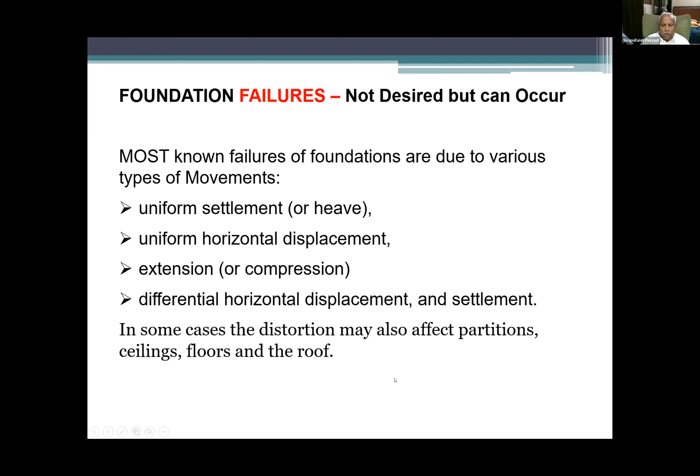Foundation failures are not very uncommon, but they are not desired. Many times we attribute failures only to movements such as uniform settlement or heave, uniform horizontal displacement, extension or compression, differential horizontal displacement and settlement. In many cases, this failure may not be reflected as collapse of the structure, it may instead appear as distortion, also affecting partitions, ceilings, floors, and roofs, etc. This is common.

When you load a foundation beyond its desired capacity or allowable pressure, it will undergo settlement or develop cracks and fail. This is the one which all geotechnical engineers are well aware of.

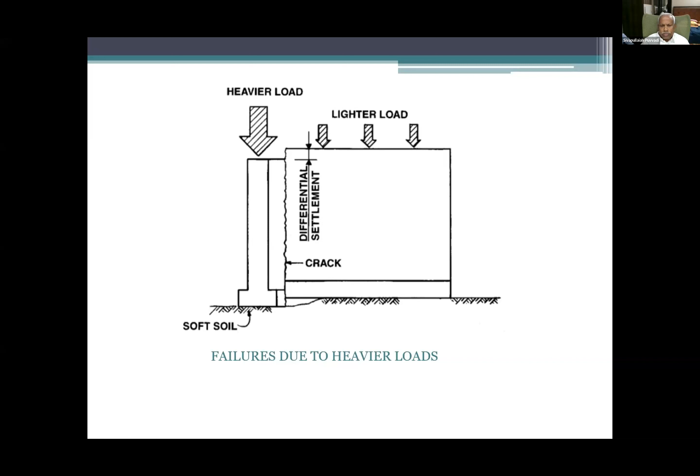Now, as I told you, the failures may be reflected as structural cracks, foundation movement, opening distortion. Foundation movement tends to distort openings and often causes doors and windows to stick. Floor movement is the initial effect of foundation movement on unstable soil beneath, or bulging of the floor. Today we discuss about problems not necessarily related to heavier load or soil capacity, but unexpected, unseen, surprising heaving, whose characteristic behavior is totally different from the heaving we know from geotechnical engineering.

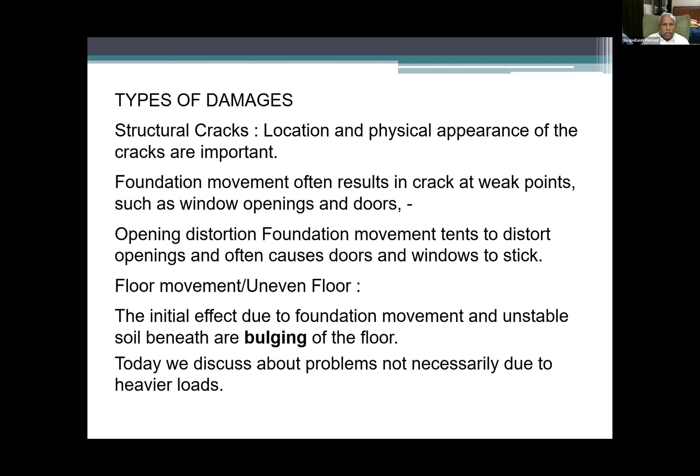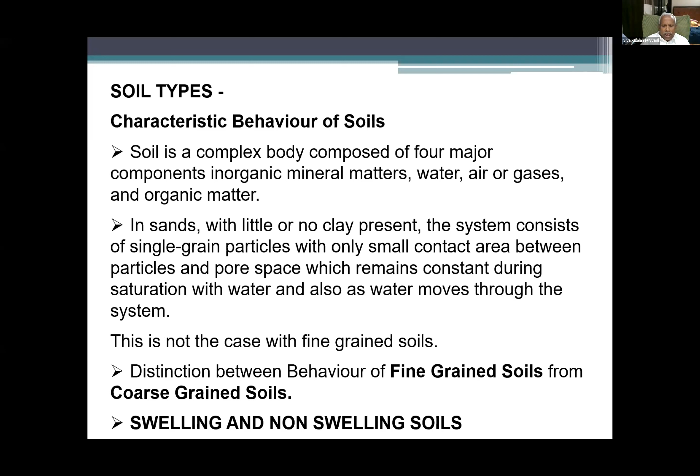Soils are initially classified as coarse grained soils and fine grained soils. As all of you know, there is not much of a problem in foundations on coarse grained soil, but when it comes to fine grained soil, we have to be a lot more careful, because each clay behaves quite differently from the others. Coming back to the behavior of fine grained soil - why do different clay soils or fine-grained soils behave differently?

It is because they undergo more volume changes. They swell and shrink on wetting and drying, and they are also influenced by ionic concentration or the composition of the pore fluid, or the leachate, or any other contaminant present in the leachate. And how this reaction occurs under different environmental conditions depends on the way they are formed.

Whether all of you know how different clay minerals are formed - I will just summarize, but I will not go into details, as most geotechnical engineers are well aware of how different minerals are formed. But I can briefly summarize their properties.

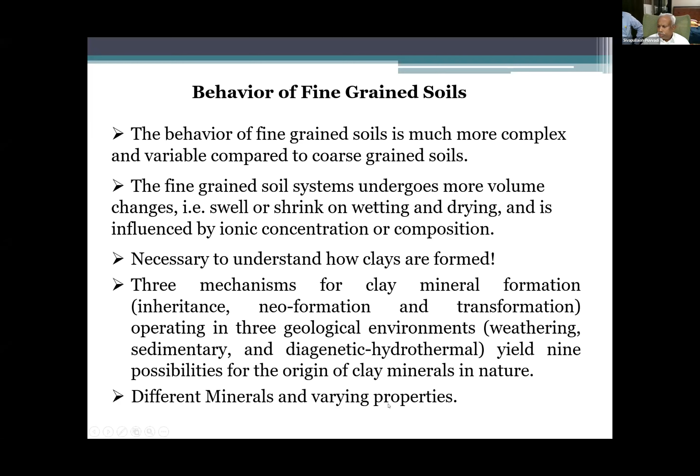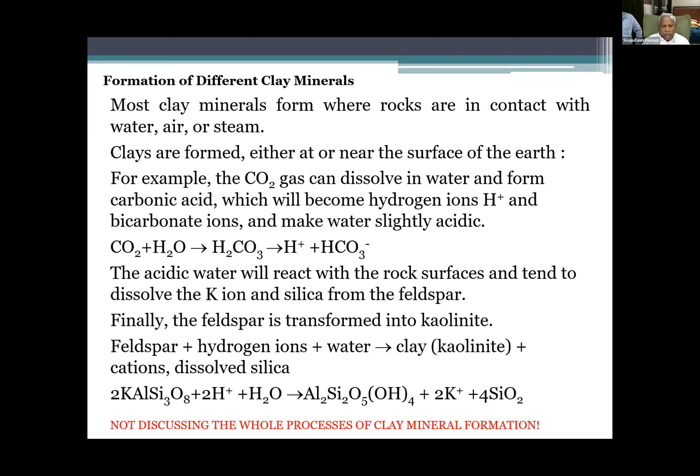As you know, clays are formed when rocks are in contact with water, air, or steam. Clays are formed either at or near the surface of the earth. Depending on how carbonic acid exists in acidic conditions, different rock types like feldspar undergo reactions leading to the formation of different types of clay minerals. Again, I'm not going to spend too much time on how clay minerals are formed or how they behave in different environments.

These are the various common clay minerals, including kaolinite, halloysite, pyrophyllite, smectite, vermiculite, illite, chlorite, and mixed layer minerals. Today I may cover a little bit about this mixed layer mineral, where not much data exists on how they behave, particularly in an environment where the pore fluid is not just normal water, but contaminated with chemicals, etc.

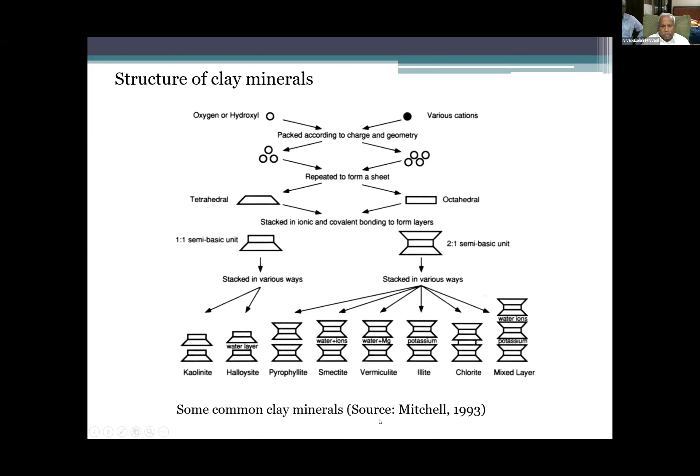Kaolinite is considered relatively non-expansive, and illite is somewhat expansive. Chlorite mineral along with illite is very common and it behaves slightly different. Vermiculite has the ability to absorb water, but not again and again. You know much about smectite, particularly when you come to the topic of smectite minerals.

It is extremely different. Say, for example, sodium montmorillonite - all of you know it. The liquid limit of sodium montmorillonite can go up to 1,000, whereas calcium montmorillonite can be only less than 200. You can estimate the way smectite behaves just because of change in the exchangeable ion. So when that is the case, there are a lot of changes in the behavior, particularly the swelling behavior of montmorillonite, which can vary very drastically.

The amount of water absorbed in sodium montmorillonite, or sodium smectite, is 18 layers of water molecules between layers, whereas for calcium it can be very, very less than that of sodium smectite or sodium montmorillonite. So these are the normal changes that occur in the clay mineral. Say, for example, initially when it is sodium montmorillonite and it gets exchanged in the field condition, the swelling pressure or the allowable pressure can change drastically, and there can be a lot of implications for structures that are built on this kind of soil containing montmorillonite.

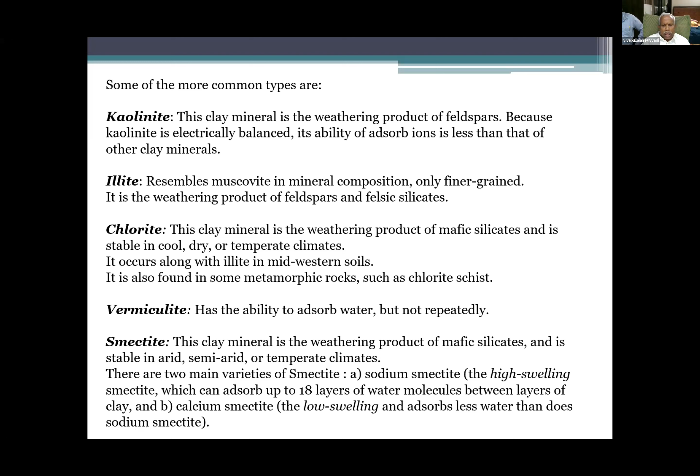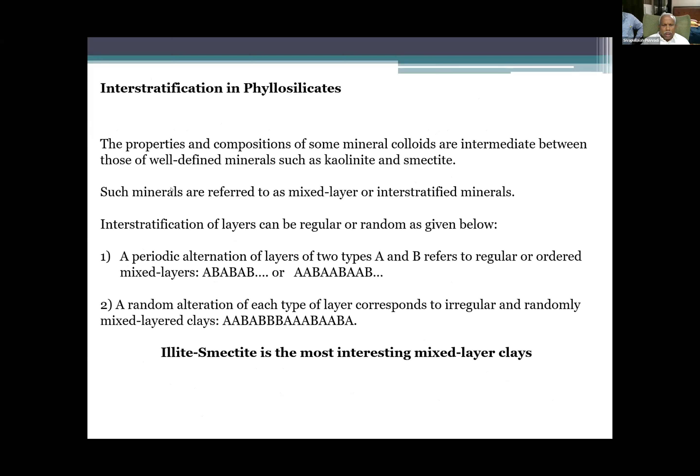Now I will talk a little bit about interstratification of phyllosilicates. These are not like well-defined minerals such as kaolinite and smectite. These extreme minerals can be interstratified by different layers, each layer varying from the other. You can say, for example, there can be illite and then smectite, then illite, and there is an extent of randomness of these layers.

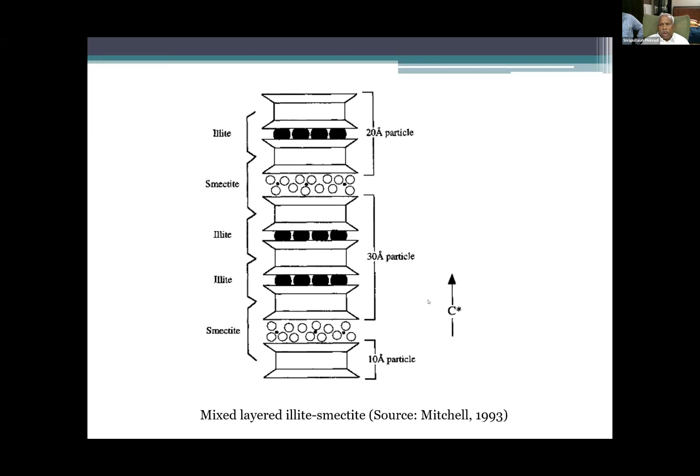All these clay layers are phyllosilicate layered structures - very well defined layers of smectite, kaolinite, and illite. When it is an interstratified mineral, the structure can be quite complex.

So basically the clay minerals' behavior depends on the cationic exchange capacity. I hope all geotechnical or foundation engineers are well aware of the cationic exchange capacity, specific surface area, and the dominant clay minerals present in fine-grained soils.

So the clay minerals can have very high swelling if they contain 2:1 minerals whose specific surface can be up to 800 meters square per gram. Specific surface has a great role when it comes to changes in the nature of the fluid or chemical that is going to interact. Whereas, say for example, kaolinite can be only 10 or 20 meters square per gram.

So when there is a huge change in the cationic exchange capacity, as I told, the liquid limit of montmorillonite, even in natural condition - not highly purified - can be 300, 250, etc. And again it can change depending upon the exchangeable ion, and the interaction that takes place because of the large specific surface of these clay minerals.

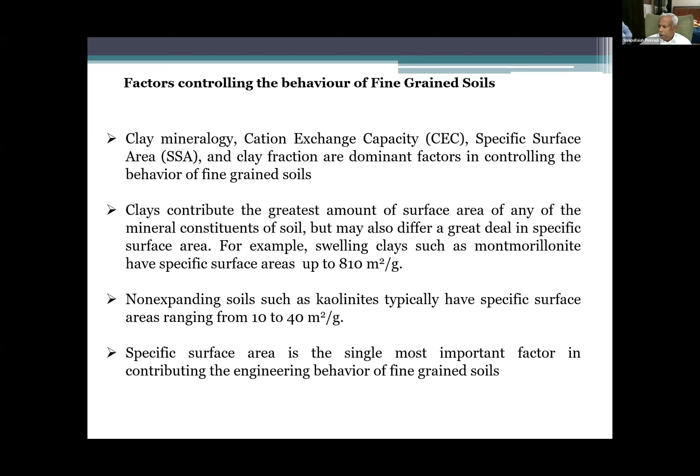So without going into much detail on this aspect, which I assume most geotechnical engineers have some idea about, the topic I wanted to cover is slightly different. This is only some basics I'm trying to give. This is a summary where the cationic exchange capacity and swelling potential of different clay minerals can change.

Now you know that clays, particularly when they have negative charges on the surface - no particle which is not ionically balanced can be stable. These negative charges on clays are neutralized by attracting positive cations, whether it is sodium or calcium or any other ion. But when these clays, which have cationic exchange capacity, also allow water to be absorbed, the particles are separated in the initial stages of swelling. I am trying to explain the basic swelling as understood today by almost all geotechnical engineers.

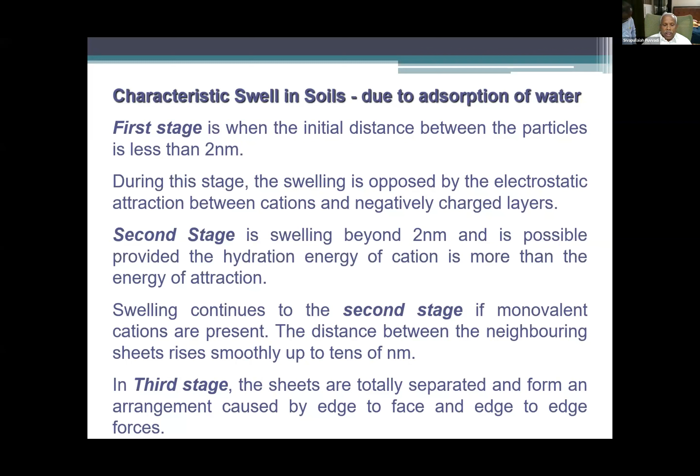I assume all of us are familiar with the effect of changes in the fabric, whether dispersed or flocculated. The behavior of clays can change very much depending upon whether it is flocculated or dispersed.

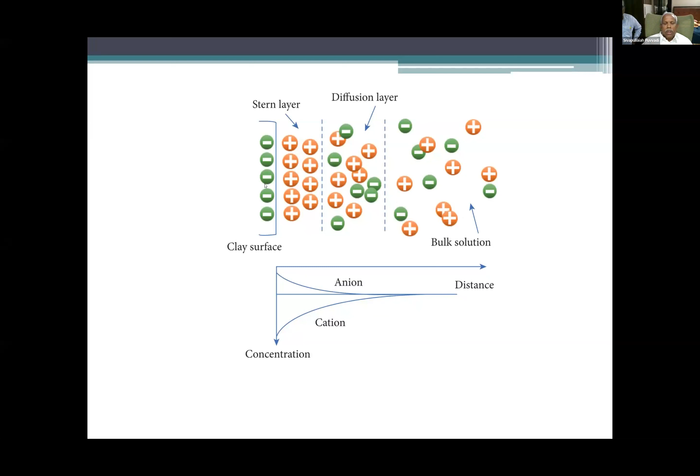Next, this is again how the negative charges behave once absorbed on the clay mineral surface. We will try to explain the extent of separation by diffuse double layer thickness. When the clay mineral surface is negatively charged, the positive ions try to come as close as possible. The closest layer of positive ions is in the stern layer, much more strongly absorbed to the clay mineral surface. Moving to the next stage, the attraction goes on decreasing. So how the concentration of anions and cations are distributed near the clay mineral surface dictates how the clays can swell and consequently how they behave in contact with water.

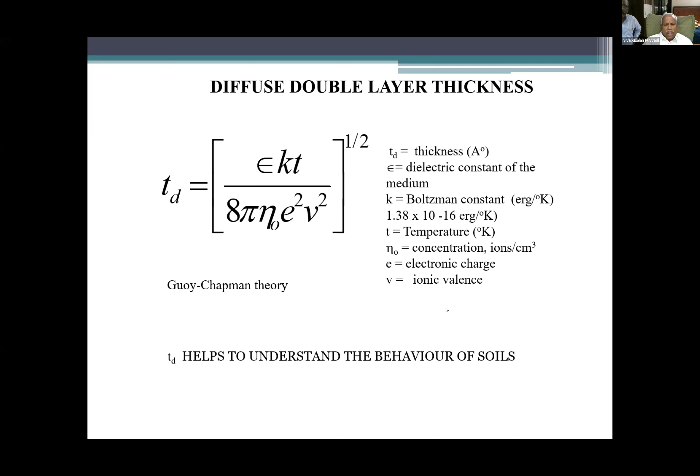There is a theory, the Gouy-Chapman theory, which lets you calculate the thickness of the diffuse double layer. This means the extent to which the negative charges of clay minerals can exert control over water as well as the cations absorbed on the surface. This is commonly used, most theoretically, but in field conditions there are a lot of limitations. I will tell you that next.

Limited, because diffuse double layer theory can somehow account to some extent for the behavior of smectite or montmorillonite kind of clays, but it cannot explain the role of cations on the kaolinitic type of soils. This is where most predictions based on the liquid limit of the soil are only relevant to smectite type minerals. So when it comes to kaolinitic soil and its changes, it totally fails.

In fact, I've seen, I should not name some of my former students, not my student, I'm talking about the whole group, where they conveniently eliminated the kaolinitic soils in their prediction and confined themselves to soils which are montmorillonitic type. And again, these predictions can go wrong when there is electrolyte concentration or sometimes when there is hydroxide.

For example, in the case of kaolinite, when ions like fluoride or DMF or dimethyl sulfoxide come in, they can throw away the hydroxyl ion of the kaolinite and it will swell. In fact, these clays swell much more than montmorillonite in the case of certain ionic concentrations present in the leachate. Let me repeat this: kaolinitic clays, because of replacement of hydroxide on its surface by other ions like fluoride, DMF or DMSO, can swell much more than montmorillonitic soil.

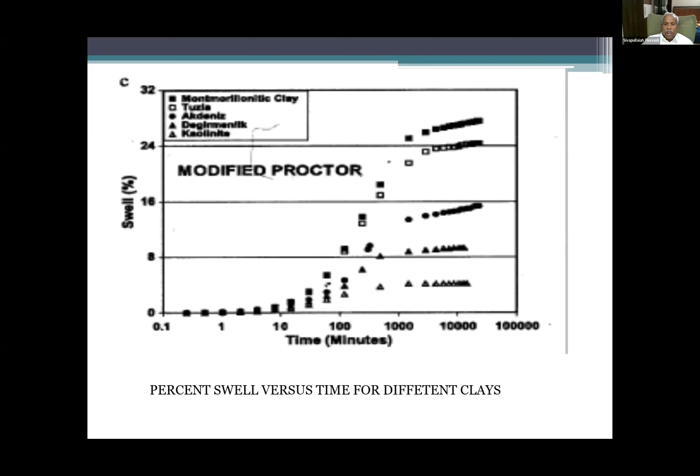That's why, for example, we can predict the percentage of swell using an oedometer, or pre-swell oedometer swell at a nominal surcharge, depending on density, which plays a very important role. Different clay minerals swell to different extents. When you plot time versus percent swell, the characteristic swell behavior occurs in initial, primary, and secondary stages. We define a coefficient of secondary compression, the secondary swell, similar to what you can say about compression.

But the forefathers of soil mechanics never tried to probe too much into swelling. They concentrated only on settlement or compression, unlike the case of swelling, which you can similarly classify. Predictions are based on the nature of the curve.

Based on the initial way the soil can swell, the ultimate swelling is predicted based on the mathematical nature of this curve, the S curve. We can predict the ultimate swell. Of course, that is a separate topic, maybe for question and answer. But we can predict the swell behavior of normal soils based on the swelling in the initial stages.

Another factor, as I told, is the fabric. The fabric is a very important thing. I used to ask my students: what is flocculation, what is dispersion, you should be able to explain. The structure of the foundation soil changes from flocculation to dispersion or dispersed to flocculation, depending upon the environment. When the salt concentration in the fluid is very high, there will be aggregation. When the pH is very high, the soils can swell very high, and there will be huge difference.

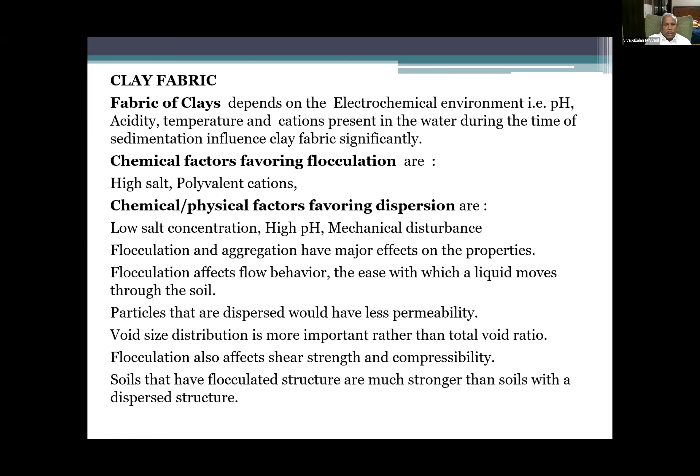Now, this is the beginning of my actual lecture. This is only introduction. Don't be afraid, I will not take more than what Professor Reddy has allotted to me.

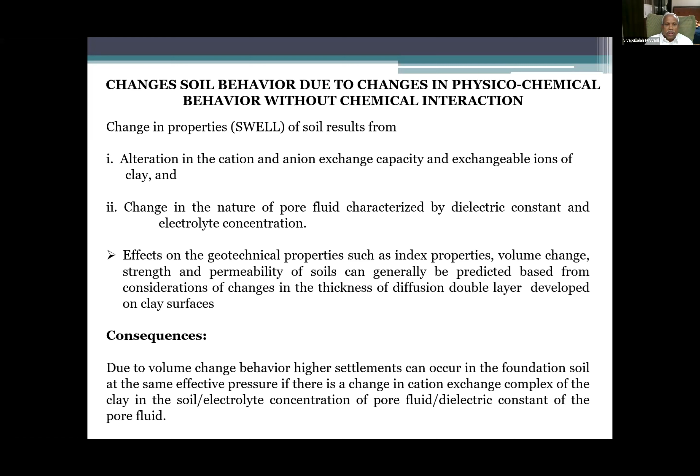I will talk briefly about the behavior of soils without and with chemicals. When there is a cationic change, there will be a change in behavior. When the dielectric constant of the pore fluid changes, we can explain the behavior. When anions are present in the system, the characteristic swell of the soils also can be understood. These changes, to some extent, are understood, but people have not concentrated on why these changes in the characteristic of soils can occur.

So swell potential can change depending upon the type of clay, type of exchangeable ions, electrolyte concentration, and particle size distribution. More than particle size distribution, I will weigh much more on void size distribution. See, for the same void ratio, if it is divided into a large number of finer voids, the total void ratio being the same, the void size matters a lot.

Say, at the same void ratio, when the void sizes decrease, tortuosity comes into the picture. The way the fluid can go through small voids, finding it very tortuous, very difficult to go through the soils when the voids are divided into very, very finer sizes. And of course, total water content affects the behavior.

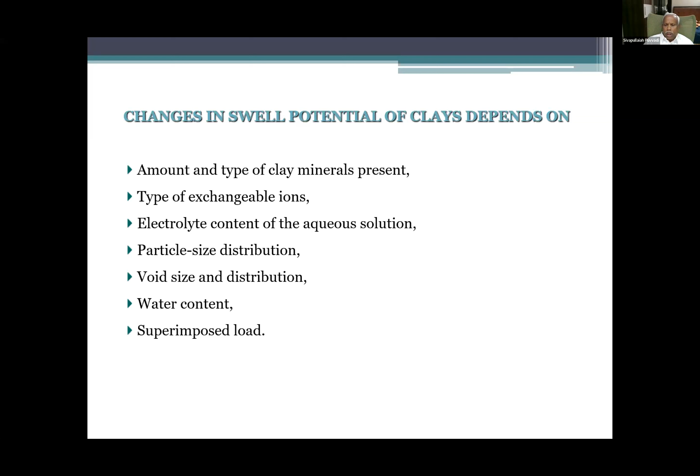Suppose the soils are loaded more than their allowable swelling pressure, then the variations are very, very minimal. Whereas if it is underloaded, the problems are much more.

For example, schematically, when there is a contaminant fluid beneath the foundation, contaminant is occurring. When the contaminant is trying to enter into the pore fluid, there is high concentration of salt, say for example. Of course, I can put many scenarios, but the simplest way of expressing is that when the contaminant is flowing, the swelling pressure of these soils can reduce and the settlements will be more.

So it will not go uniformly at a time, so the structure will tend to settle towards it. And vice versa, if you put a contaminant which can cause swelling, the structure will undergo a different kind of tilting. If you dance, well, it's okay, but we don't want structures built on our clays to dance. Dancing is fine when you're watching a movie, but when the structure undergoes uneven settlement on one side, and unlike settlements, heaving also can cause differential heaving.

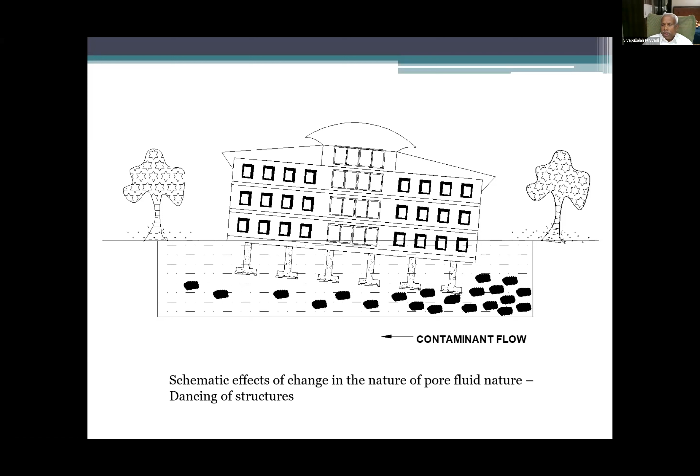Normally, people don't talk about differential heaving as much as differential settlement. So I would like to emphasize more on differential heave in this kind of scenario rather than differential settlement. One more example: kaolinite soil can swell much more in kerosene, whose dielectric constant is very low, than in water. Whereas montmorillonite soil can swell much more in water than in kerosene.

If you take kerosene as the pore fluid, which soil will be more called swelling type? You call kaolinite as swelling type and montmorillonite as non-swelling. That's why the whole basic concept of expressing free swell index is modified.

We should not take these volumes as real. To define that, we have to modify this equation: V minus Vs by Vs. The Vs is the volume of the soil solids, total volume in kerosene or water.

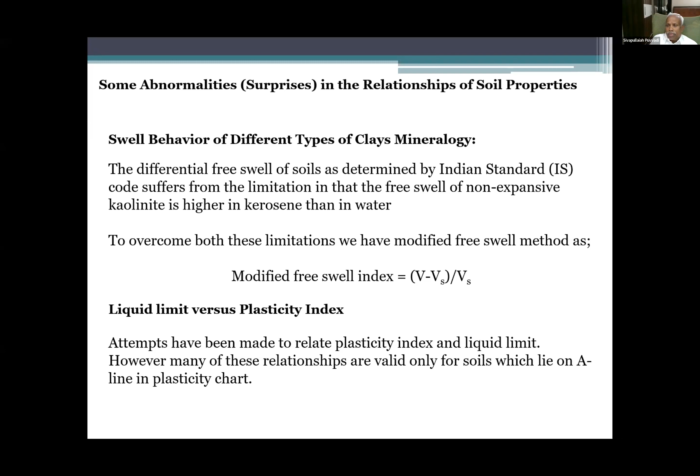Because of this kind of scenario, there can be a lot of distortion to our understanding of the relationship between liquid limit and plasticity index. For want of time, I'm not going into details. And then we have an understanding that plastic limit is higher than shrinkage limit—no, not always.

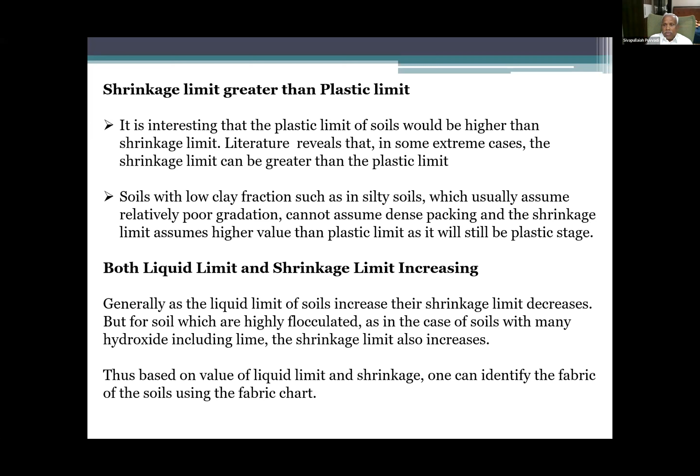So in both cases, normally what do we say? When the liquid limit increases, shrinkage limit decreases. But there are cases where liquid limit and shrinkage limit both can increase. That is because of the pore fluid concentration varying, or contaminant present in the fluids.

And similarly, density effect on the strength of the soil. As we know, as the density decreases, strength decreases. But in some cases, when the density is decreasing, strength is actually increasing.

This is the normal scenario where some of the changes are: when the soils are flocculated or connected, density is much less important than the structure. So there can be a scenario where with increasing density, strength can decrease.

If we say that, people won't accept it immediately. But there are conditions where density increase does not necessarily increase the strength if the pore fluid is different.

Coming back to lime stabilization, I just now understood that still some people are actively working on stabilization of expansive soil, because now we know why we have to stabilize montmorillonite, where conventional mechanical stabilization is not that effective, but lime stabilization can bind the soil particles. I'm not going to explain the basics of soil stabilization using lime.

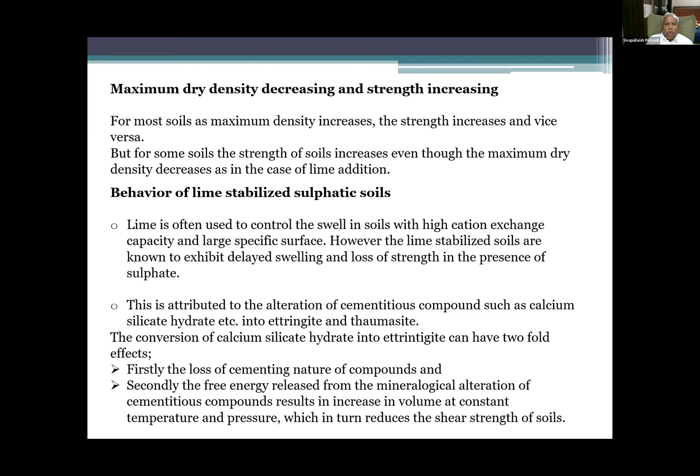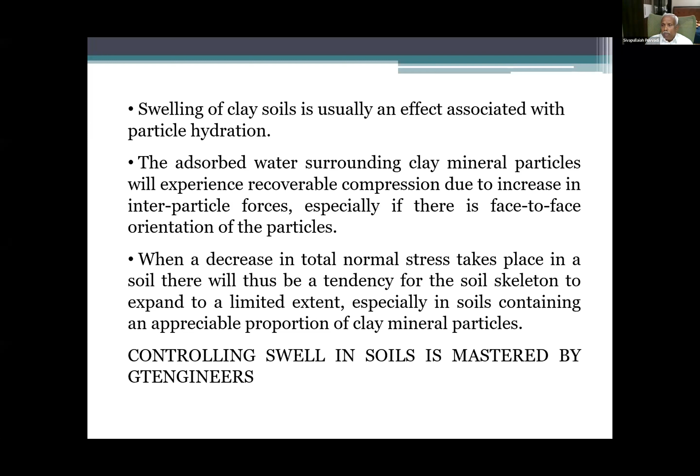These sulfatic soils can swell because of formation of calcium silicate hydrate gel, which is a cementitious compound, that is converted into ettringite, which is a swelling type of mineral.

Again, I am a little bit intrigued and I tried to probe a little more. Suppose you add ettringite mineral itself to a soil, can it swell? But I found that's not the case.

But the ettringite that is formed after interaction of lime with silica and calcium silicate is formed slowly. These needle-like structures of ettringite are formed, which hold a lot of water.

When the water is absorbed so high into the interlayer, the particles are separated. There is a huge swelling in soils in the presence of sulfate. So my submission to those who are continuing to work on lime stabilization, particularly in different environments—this is one case of the effect of sulfate.

We don't know in future, the way we are contaminating the soil, what type of chemicals will damage the good behavior of stabilized soils. This needs to be foreseen, and appropriate measures should be taken.

This is actually a learning point for me to probe further into the uncharacteristic soil behavior of soils. So I'm watching time also—normally when I'm involved, I lose track of time.

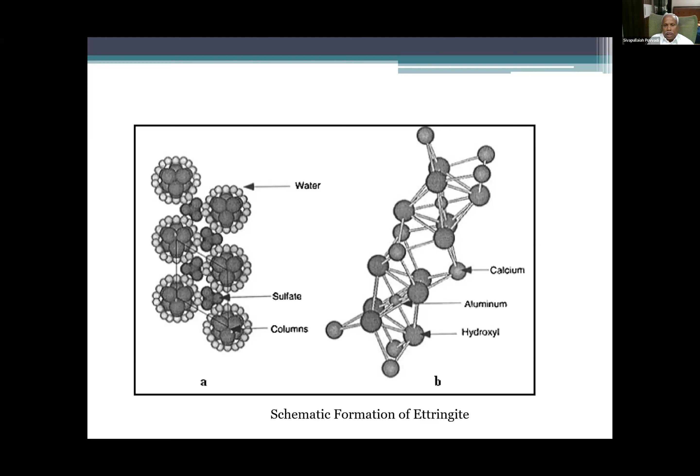I'm worried about time because I get involved. So this kind of thing occurred—this is your ettringite, what people call it.

Now I will come to a few case studies reported earlier, and my own experience of unexpected soil behavior of heaving. The first I told you—one of the classical cases is in a fertilizer plant where they are draining out the waste treated phosphate, which is used for the manufacture of fertilizer, and this leaks into the subsoil.

Slowly, and that soil is a non-swelling kaolinitic type of soil—nobody expected that soil would swell. But slowly, over many decades, the soil started swelling and heaving. This is because, and this heaving is much more in kaolinitic soil than in montmorillonitic soil, the hydroxide is replaced by a bulky phosphate ion, whose structure is similar to water.

I am not going to explain the structural similarities of water and phosphate, unlike hydroxide that will separate the kaolinite particles. This being the case, when phosphate is introduced into a non-swelling soil, that soil swells a lot. If I say kaolinite swells more, people won't accept it.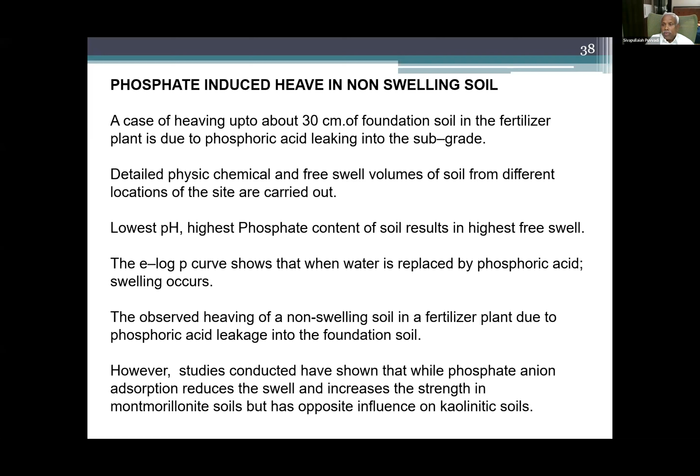What is swelling or non-swelling is an environment-related parameter. We cannot say swelling soil or non-swelling soil applies in all environments, particularly with phosphate. One fertilizer factory case, I myself dealt with. Then I went to literature that was also reported earlier. Then we wanted to check whether it is really true that when phosphate comes into the foundation soil, it swells.

So what we did is we collected uncontaminated soil near a fertilizer plant and ran the conventional oedometer test. When you add water, it's normal. In the rebound, when you put phosphoric acid, it rebounds more. So these swell. We repeated this at different pressures, putting water or acid. We found water always settles.

If you put acid, it will rebound more - huge rebounds. That means when you put acid and take out water in the oedometer to the extent possible, then try to put phosphoric acid, it will swell. So we have confirmed that the soil can swell, will swell in kaolinitic soil if phosphate is present. So this is the issue.

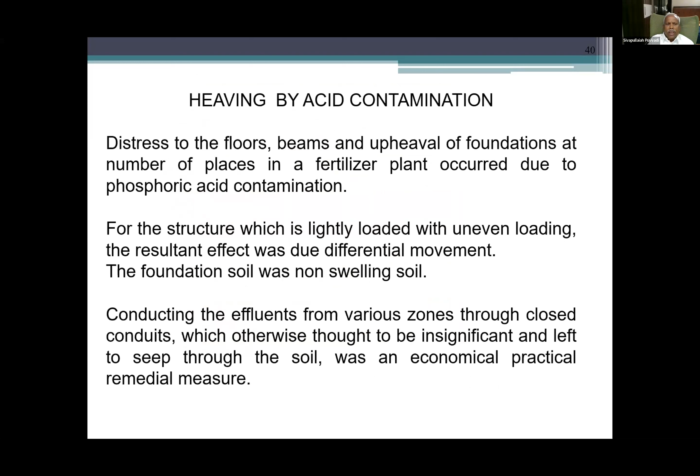This I repeated in some other cases. So we studied this - it is because of replacement of hydroxide. Simple, any student can do: in a kaolinitic soil, put water, some free swell will occur. Instead of water, if you put sodium hydroxide, or instead of hydroxide if you put fluoride - HF, sodium fluoride or something - it will swell more. Because hydroxyl ions have hydrogen bonds between interlayers, but when that hydrogen bonding is removed by the presence of fluoride, the kaolinitic soil will swell.

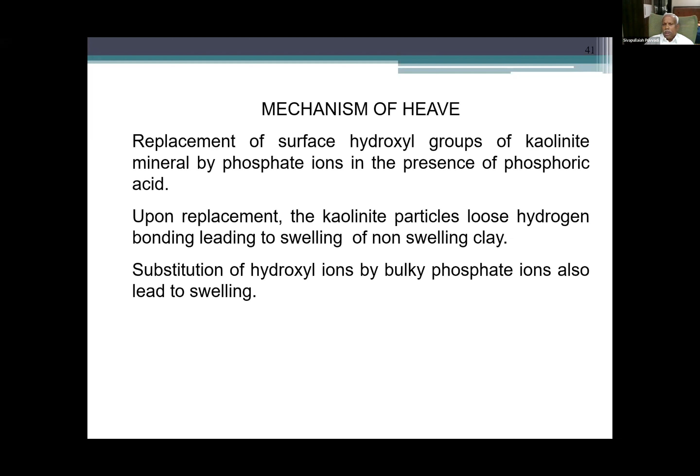So this swell is again unexpected, surprising swelling in soil. This is surprising because we never thought kaolinite would swell. When it swells, we call it surprising and close the chapter. But we have to probe and try to find out how it can swell. A similar case was reported at a Jordan fertilizer plant.

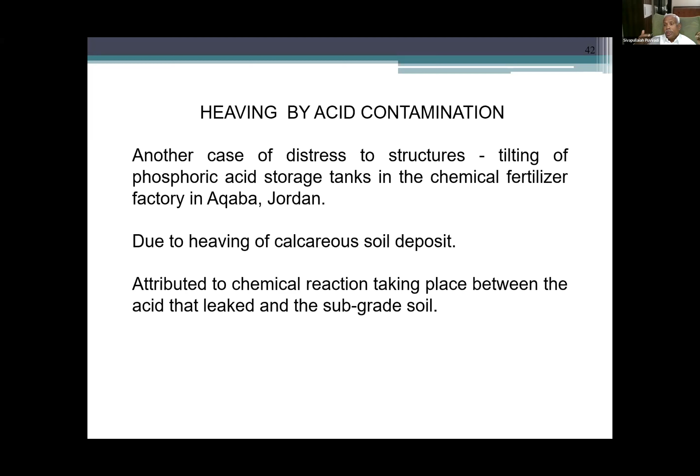This is one story for one type of soil; where the type of soil changes, the story varies to different degrees. Each case could be explained for an hour, so now we'll talk about remedial measures. Unlike ordinary swelling that is controlled by imposing higher surcharges, this kind of swelling cannot be stopped by increasing the surcharge.

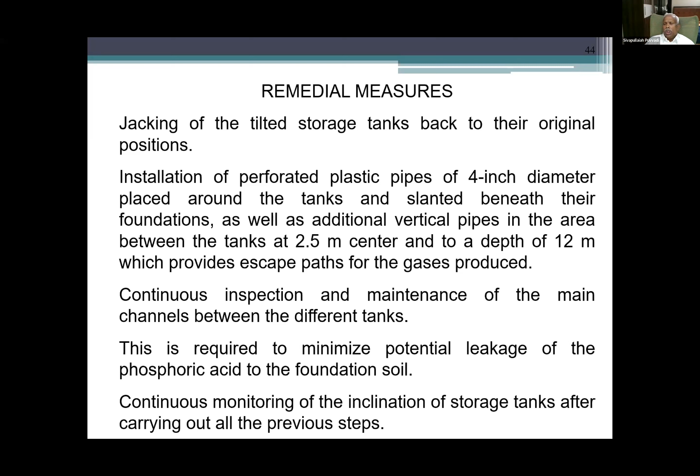So your conventional jacking of foundations or tilted tanks from the other side - of course you can also compare to the Pisa tower. What methods can be used to control the leaning of the Pisa tower? That is much more sensitive; you cannot do any experiment on it. But the conventional methods of correcting tilting of buildings, tanks, or towers are not possible using conventional understanding in the geotechnical industry.

Another thing: when caustic soda enters the soil, there will be foundation heaving observed after 20 years of operation. I am fortunate to have a connection with one industry that approached me for this correction. After trying all their conventional methods of control - leaching, loading - all conventional methods of correcting the damage to the floors.

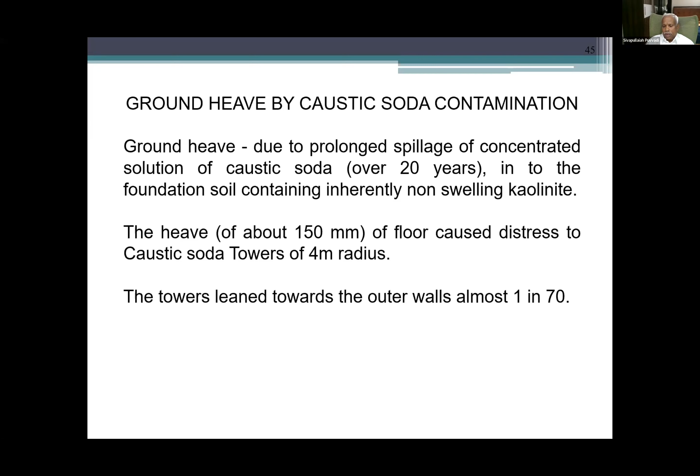Subsequently, we suggested remedial measures for correcting the rising of the floor due to alkali contamination. So now, coming to the mechanism of correction for heave caused by sodium hydroxide or alkali solutions - I will give one more case study, maybe 5 minutes, and try to wind up.

Under 5 minutes, sir, 10 minutes, Professor Reddy? Yeah, no problem, go ahead.

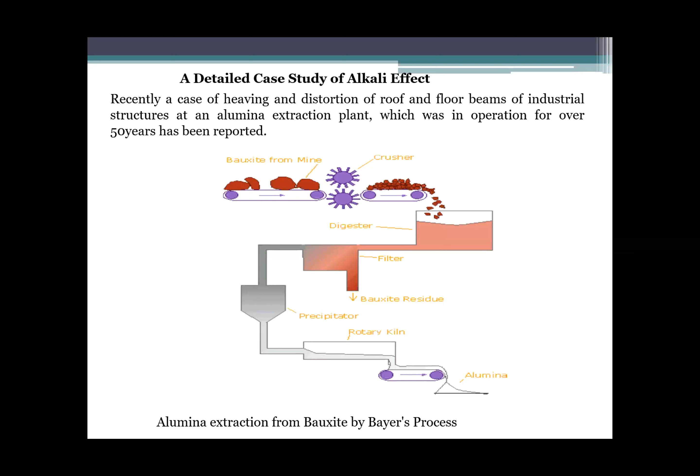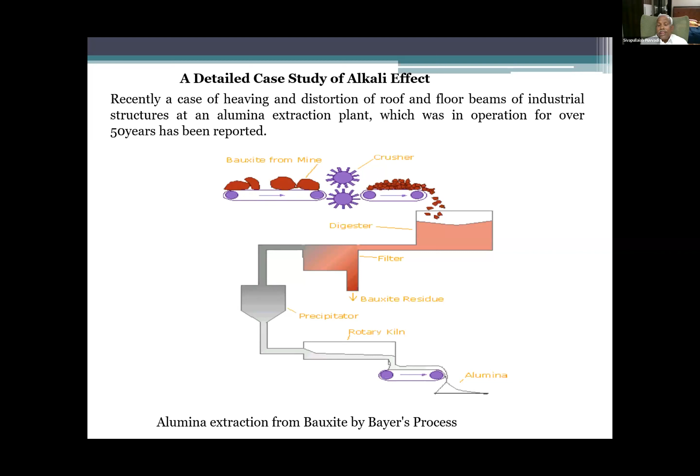This is one case, a company processing bauxite ore. Bauxite ore is very stable. To extract alumina, it has to be digested at very high temperatures and pressures with a strong alkali solution. So when there is treatment of bauxite with strong alkali at high temperatures and pressures, leakage occurred. That's why, in the next slide, you see how the alkali is leaking into the foundations of the factory.

Alkali is spread into the foundation soil. Normal problems of concrete is one thing, that aspect I am not covering today. But when it goes into the foundation, a lot of damage is done. That's why I say it is not the problem of civil engineers, it is the poor mechanical engineers who allowed leakage and converted all geotechnical engineers into geoenvironmental engineers.

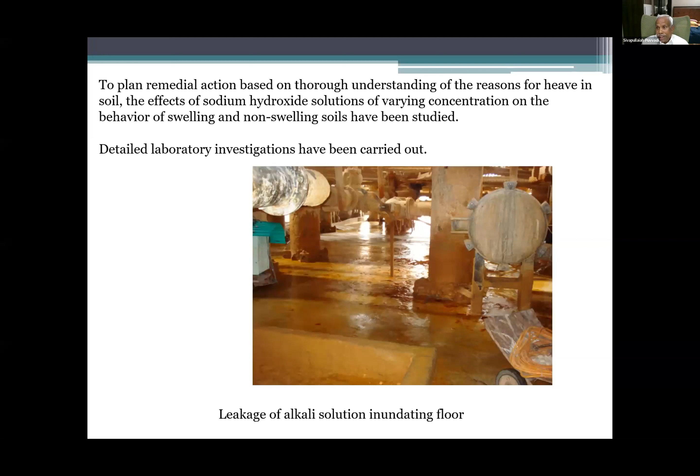So this soil is heaving because of alkali. But unlike some of the cases I have presented, it is not only kaolinitic soil, montmorillonitic soil also can swell. This is the case where swelling can occur in any type of soil if it interacts with the alkali solution.

Of course, one answer is zeolitization of the minerals by interacting with the alkali. We call these modified soils. In fact, now I try to say it is modified - India is getting modified now, not modified. So the soils also can get modified, and a lot of this occurs for any type of soil, whether kaolinitic soil. Now, how do you prove that kaolinite can swell?

And what is the effect of duration? What is the effect of concentration? So we have studied one soil, compacted to the same density, and allowed conventional oedometer test with water. Instead of water, we have used sodium hydroxide of 1 normal and 4 normal. And then under a third series, where the soil itself is initially compacted not with water, but directly with sodium hydroxide, and then added further sodium hydroxide.

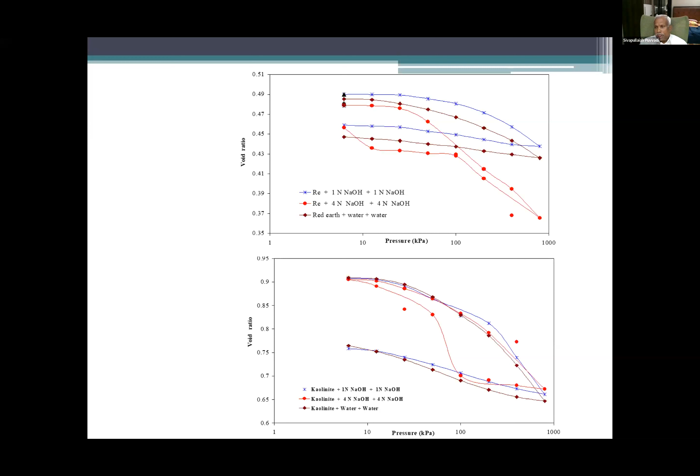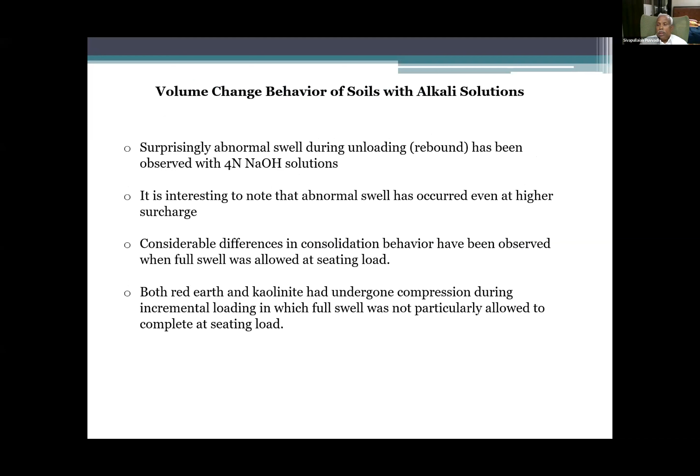Likewise, we have proved many times that rebounds will be much more if the soil is contaminated, because by the time you complete the loading cycle and start the unloading cycle, there is an initial reaction - the conversion of the minerals into something else. Of course, we have studied what mineral can convert into what mineral. And this is the one cell.

See the initial void ratio, this one, and then it goes very steep. Can you show this to anyone? If you do it normally, you don't find this, but if you give it a little time, then load it, unload it, it goes very steep. To report this kind of result, we need a lot of conversion and repetition, number of times, to show that the soil starts swelling during rebound.

That's why the next stage of test is we allow the reaction to complete at the nominal load itself, say for 1 month, 2 months, then it behaves normally. So once the reaction is over, the behavior is different - during the reaction, the behavior is different. What I am trying to highlight is, of course concentration plays a role, the type of minerals plays a role, but if the soil is initially itself contaminated with the fluid it is going to interact with in its lifetime, the behavior is okay.

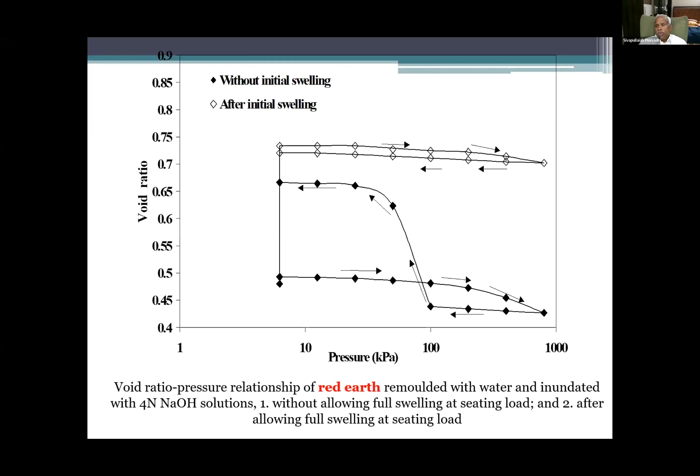That's why we say, at old age, when you have seen everything, you don't care for anything - you have achieved a mature level, the soil will become mature. If it is allowed to interact with the highest concentration, that is likely to come subsequently on this kind of soil. This occurs for almost all types of soil.

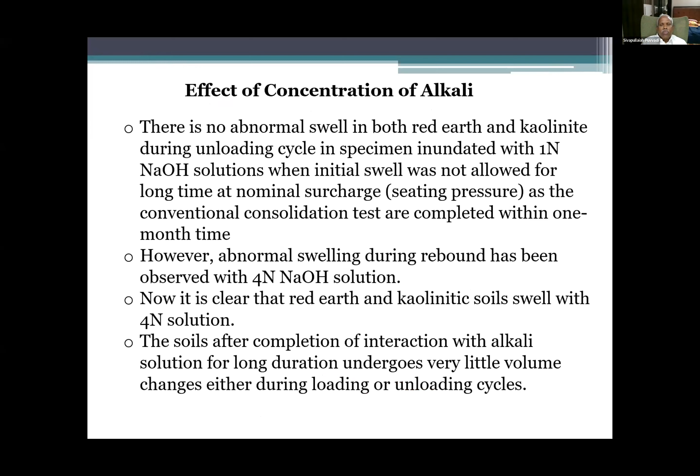So we found many soils, the rebound is much more. We have studied the effect of zeolitization, which is highly swelling. Let me try to wind up in another 5 minutes. Both red earth samples, at a nominal surcharge, were kept for 1 month. For 1 month, no swelling - simply no change in dial gauge reading. But once it starts, it becomes very steep.

Even with the lowest concentration of 1 normal, soil compacted with water, then inundated with sodium hydroxide, will swell. A kaolinitic soil swelling up to 14% is unimaginable. And this characteristic swelling, which initiated almost after a month, cannot follow a hyperbola relationship.

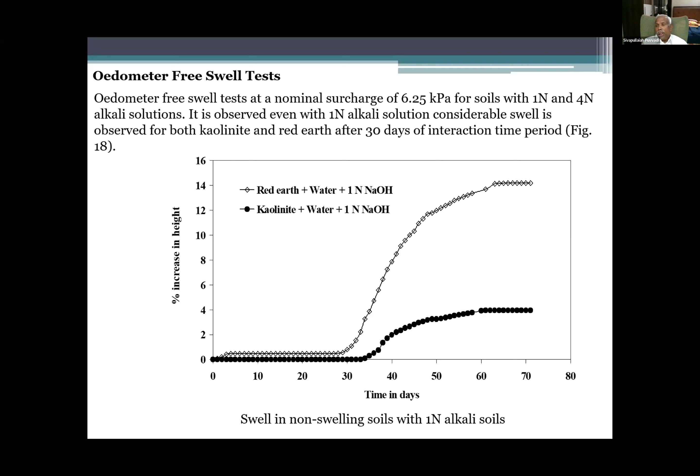This curve is different. Initially for long there is no change at all, but once change occurs, it changes phenomenally. So the swelling is unexpected - this is because of conversion of these minerals into something else. Again, if I compact the soil initially with sodium hydroxide, the swelling will be less.

So this is soil - if instead of 1 normal, we use 4 normal for a non-swelling soil, it can increase too much further. Not only does the amount of swell increase, but the initial swelling point also decreases - as the concentration is higher, the swelling starts within 10-15 days. Whereas in the case of 1 normal, it took 30 days. If it is 4 normal, it takes only 15 days.

So this is the kind of interaction. But in field conditions, continuous swelling occurs because as the leakage continues to go deeper, fresh soil is available for interaction and conversion. So it never gets matured quickly - it takes a very, very long time for the soil to become indifferent to contaminants.

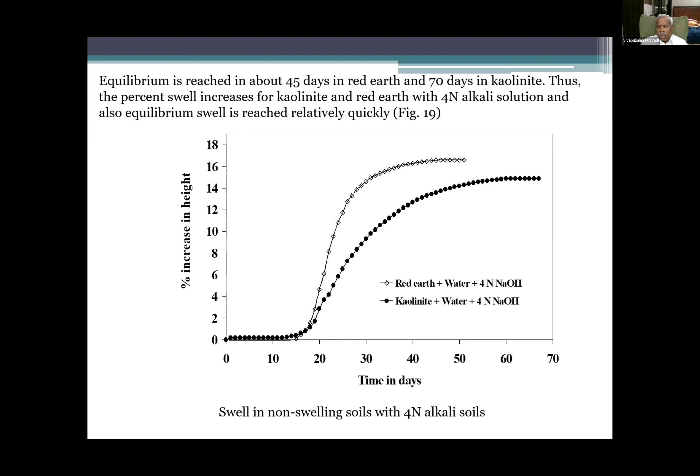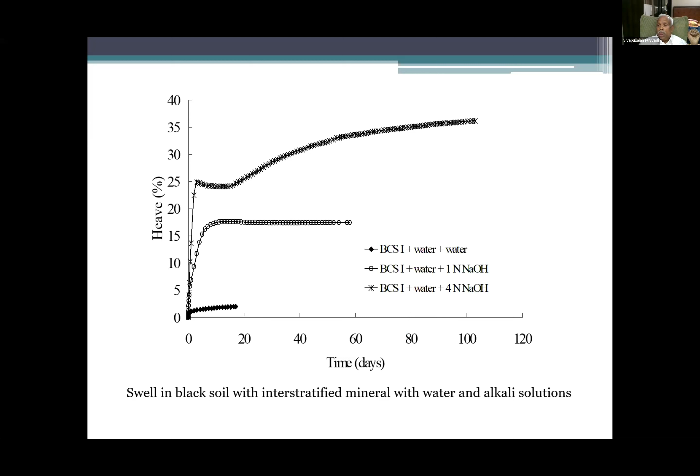Similarly, can it happen only for kaolinite? No, it can occur for montmorillonitic soils also. See, for one soil - the normal swelling of what we call black cotton soil in India, montmorillonitic soil - it is only about 2.5% swell. But the same soil swells about 18% with 1 normal, and can swell up to 25% with 4 normal. So this is the kind of change that can occur with the contaminant.

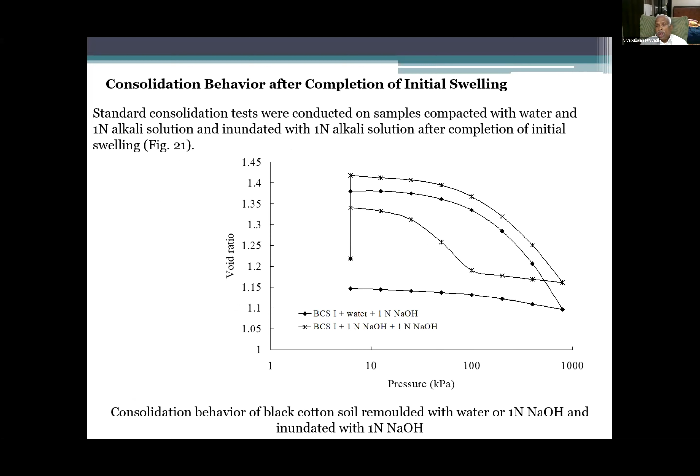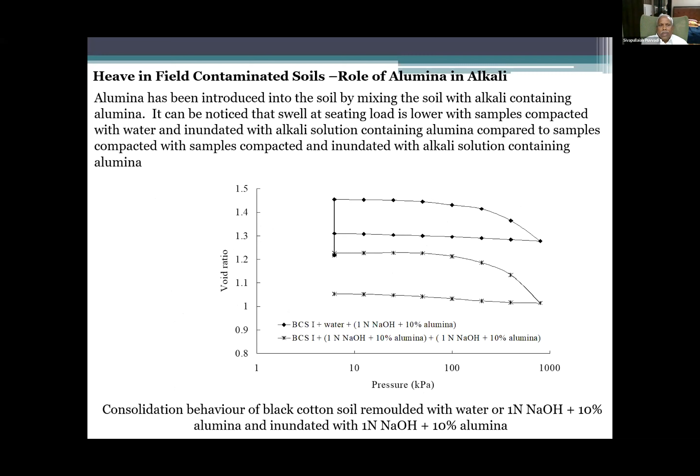Again, similarly, what is the effect of this swelling on further consolidation behavior - we have studied this, and see how all these rebounds crossing the initial point or more can occur. Interestingly, we have done a sufficient number of soils, concentrations, time durations, and varied persons to see whether anyone is doing any trick or mischief in the laboratory. So all those points were checked. Then, how to control this?

How to control this kind of swell - whether you should use ferric chloride as conventionally suggested in earlier cases. But we have tried various other options. I think that is a big story of controlling induced swelling, what I used to call uncharacteristic, unexpected, surprising swelling in soils, using fly ash, etc.

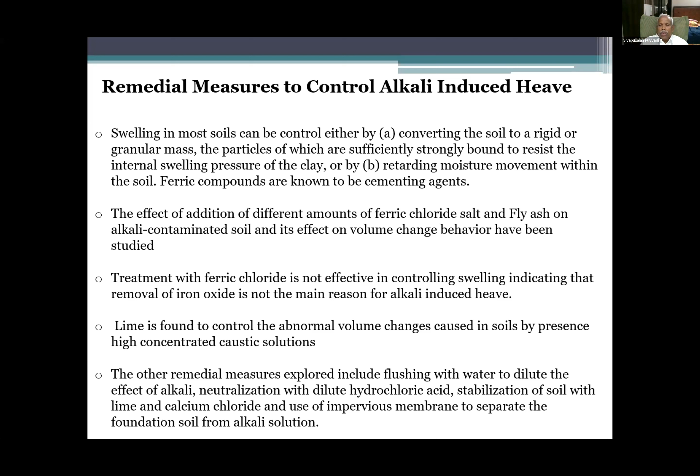And potassium chloride, because potassium can link the montmorillonitic soil and cause some bonding by linkage of potassium, like in the case of illitic structure and other soils. Is all this story restricted only to alkali? No - alkali can swell both kaolinite and montmorillonite.

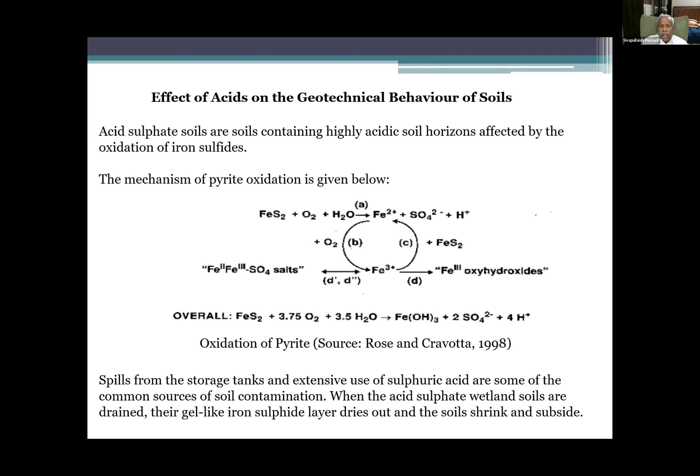Similarly, I have studied acids, where sulfuric acid can make the soil swell - this is the swell, you see. Again, I have seen it can swell by 50%. This is unimaginable. Likewise, what are the mineralogical changes, and whether it can occur for swelling as well as for non-swelling soil also.

See, 1 normal and 4 normal - 1 normal can swell up to 18%, while 4 normal can increase the swelling by 60% in non-expansive soil. But while 1 normal takes about 150 days to start swelling - and we had to fight for the consolidometer, since if you block it for 6 months, with a lot of experiments going on in those days, there was a fight for the consolidometer - simply keeping the consolidometer for one person, 1 normal starts only after 150 days, whereas 4 normal can initiate at about 75 days.

So can you simply keep and wait, praying for God for the soil to swell or sink? But it needs a lot of conviction, and of course, we have taken out the soil, we have studied all its changes and the mineralogical changes.

I'm winding up in 2 minutes. Soil heave due to increased salt also can be there. I worked on a case where salt infiltration into the foundation soil can also cause swelling.

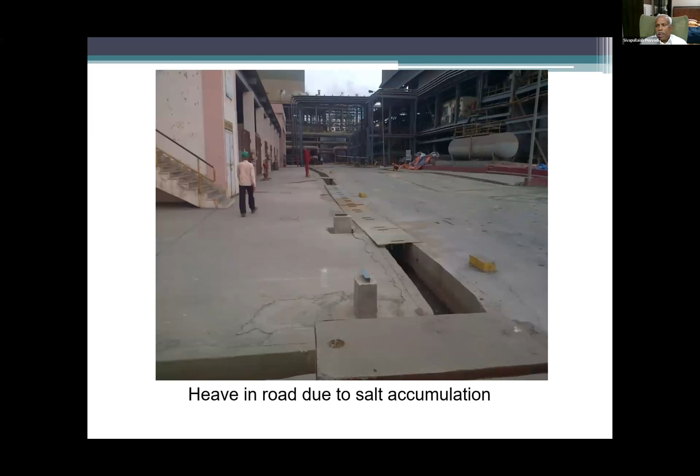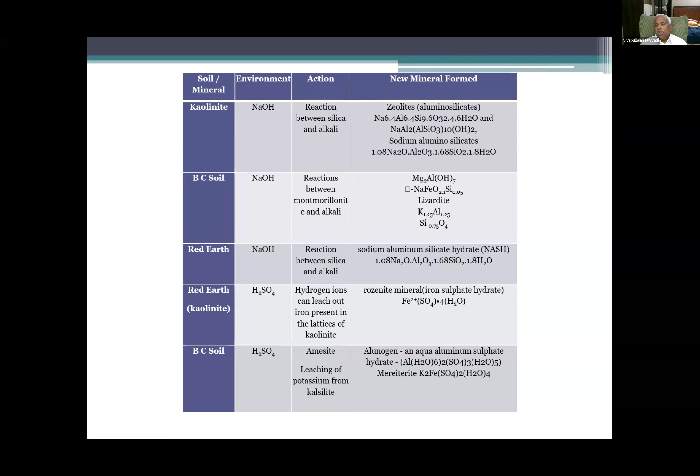Another thing is the mineralogical changes that occur in different kinds of soils in different environments. What are the new minerals identified? This conversion of one mineral to another is mainly responsible for this kind of unexpected heave in soil.

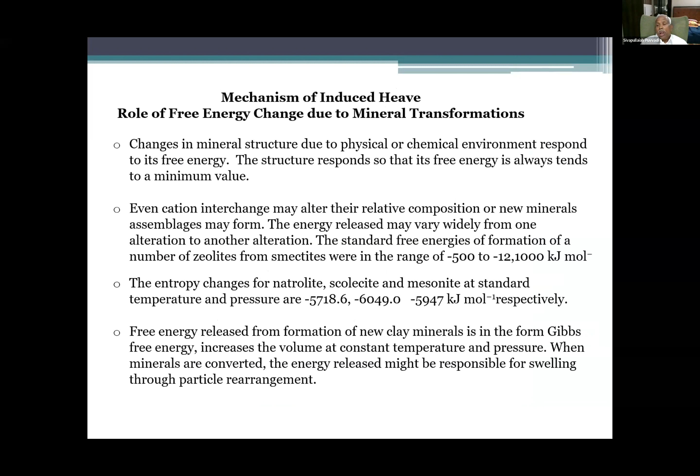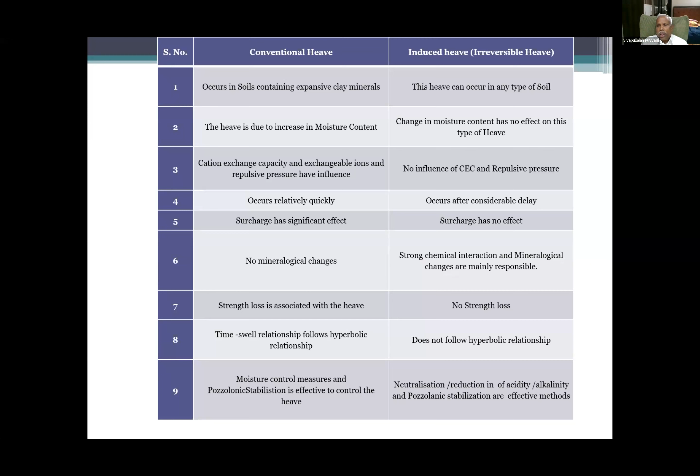Don't think all is positive, all is negative. It can also help us in some cases - it can form an impermeable soil layer. So instead of creating a soil liner by construction, you can modify the soil by using appropriate chemicals into an impermeable system.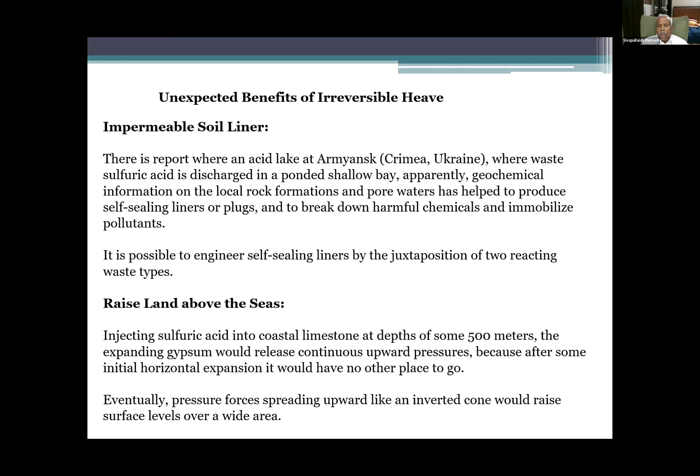So this is the story where people say there is a bridge between India and Sri Lanka, what you call Adam's Bridge or Ramasetu, which is also by some trick of converting into rising soil. So these are some of the conclusions about the Ramasetu.

Now another issue is we are struggling to cope up with the problems of behavior of soil in a contaminated ground. But now we have landed on the moon, and what kind of problems will occur in future, we have to be prepared to study the changes in the type of earth on the moon.

I think this is what I wanted to convey quickly about the unexpected heave in soil and the consequences and remedial measures. Each one is different. I'm not going to dwell further.